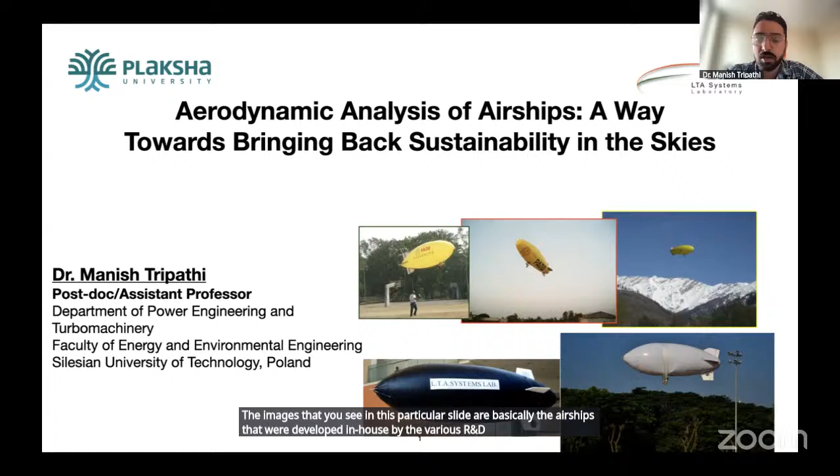So, the particular lab that we represent, the LTA Systems Lab, has been engaged in research and development of lighter than air systems for more than 2 decades. In fact, we are the pioneering lab that works in this field in the whole of Asia. The images that you see in this slide are the airships that were developed in house by the various R&D teams of this lab. So we have been privileged to pioneer this technology on a national level in India.

So, considering the fact that these systems are very low speed in nature, people don't realize how a low speed nature can be a very complex problem to solve. Lighter than air systems, we generally say, are a complex flow carrier. That is why aerodynamic analysis related to these applications is paramount, and hence the particular talk that you are a part of. This is an outline of my presentation today.

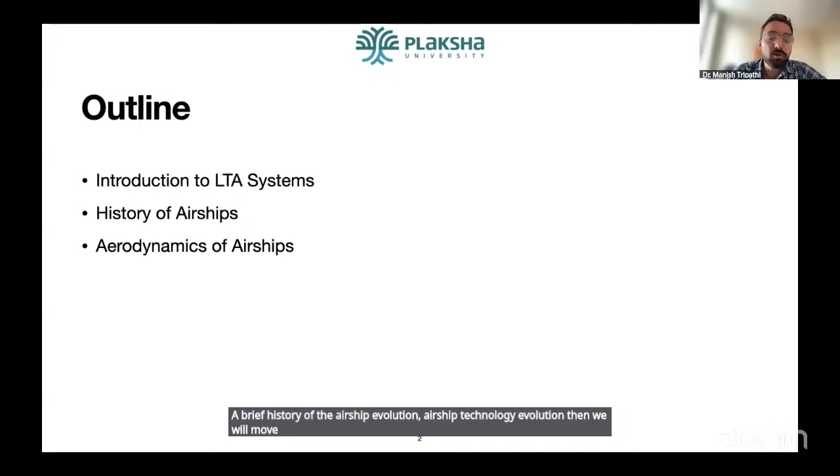Since this is the first lecture of the series of guest lectures, I will be briefly giving an introduction on LTA systems and a brief history of airship technology evolution. Then we will move on to the main topic of today's talk, the aerodynamics of airships: the different methods to understand the overall aerodynamics of airships, and the most appropriate method used recently, CFD analysis, which I will cover in a later section. After that, I will cover certain CFD investigations that we at IIT Bombay carried out previously to understand the aerodynamics of airships, and then finally the concluding remarks.

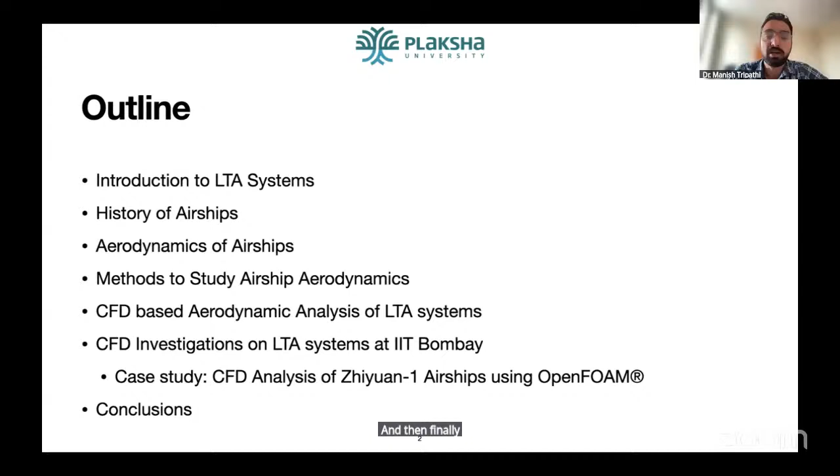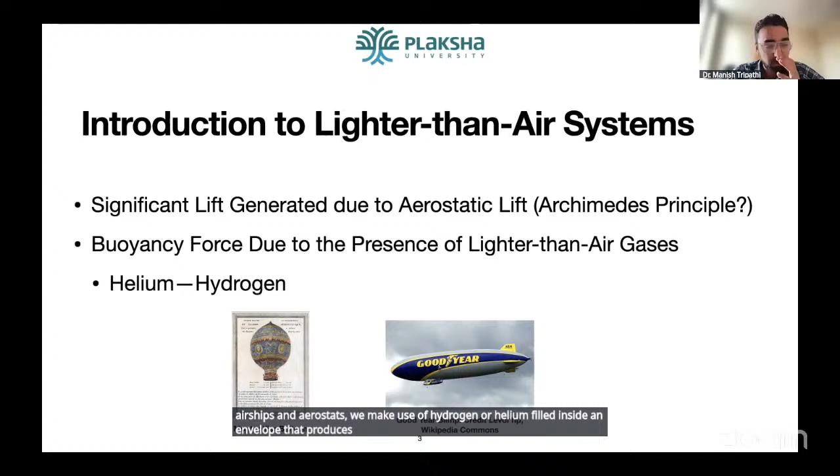So, because this is part of the LTA systems course that has already been started by Professor Pant at Plaksha University, I don't need to get much into detail introducing them. These are systems that generate the overall lift by means of aerostatic lift, governed by the famous Archimedes principle. The Archimedes principle states that whenever a low density body is suspended in a higher density fluid, an upward force is generated on it, called the buoyancy force. In lighter than air systems like airships and aerostats, we use hydrogen or helium filled inside an envelope that produces the required density difference, and hence the buoyancy force.

This is a brief comparison of lighter than air systems versus heavier than air systems. I'm pretty sure Professor Pant has already covered most of it. However, for our current lecture, the most notable point is that lighter than air systems are reliant on aerostatic lift and a subtle amount of dynamic lift, whereas heavier than air systems do not generate any aerostatic lift. They are solely dependent on the lift generated by the propulsion systems fixed on them.

Because of this, lighter than air systems are more fuel efficient. They make use of fewer operating mechanisms. However, because of their blunt geometry, they are very slow and highly susceptible to weather conditions. So the most notable point is that they are highly fuel efficient. That is the crux of why these systems are coming back, despite heavier than air systems being faster and more robust with respect to weather.

So there are three types of LTA systems. One is the aerostat. These are static in nature. They are unpowered. They include only stabilizing surfaces to provide stability to the device.

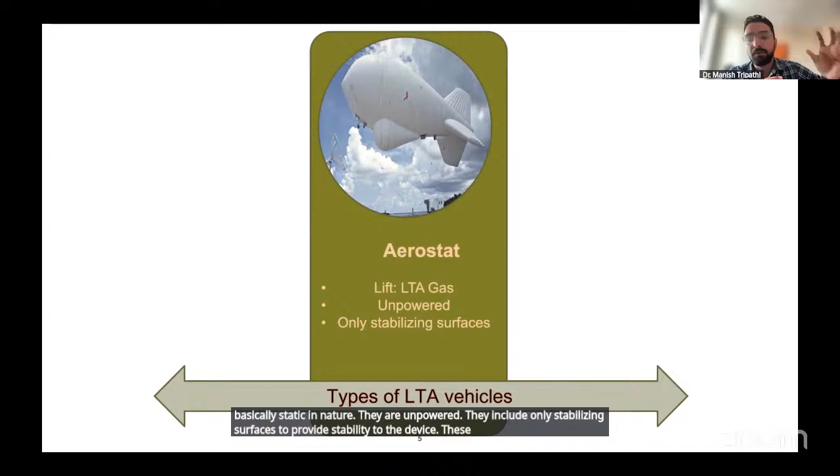These are basically static at a particular altitude and a particular position to carry out a particular application. The second and the most notable form of LTA system is called the airship. These are maneuverable. Basically, they are fitted with certain propellers and thrusters to carry out the maneuvers from one place to another, and hence they are provided directional control.

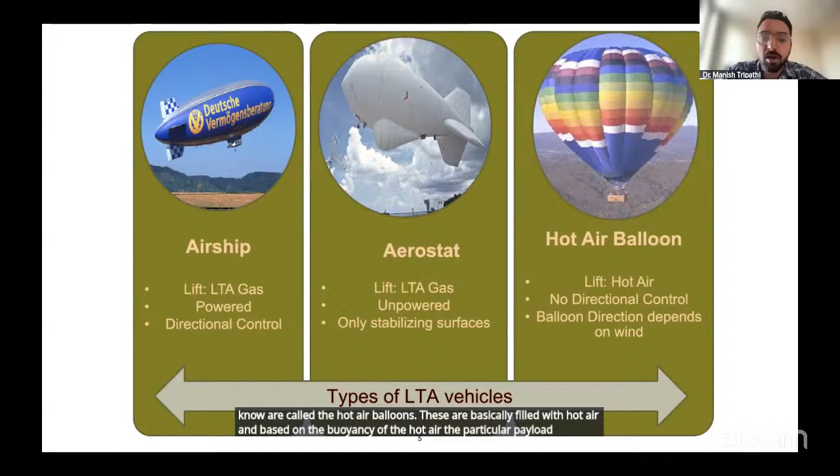The third, and most of the students might know, are called the hot air balloons. These are basically filled with hot air, and based on the buoyancy of the hot air, the particular payload is lifted up to a particular altitude. In the present talk, we'll be mainly focusing on the airships. So before going on to the more intrinsic details, we should firstly cover the fundamentals. So what are the principles?

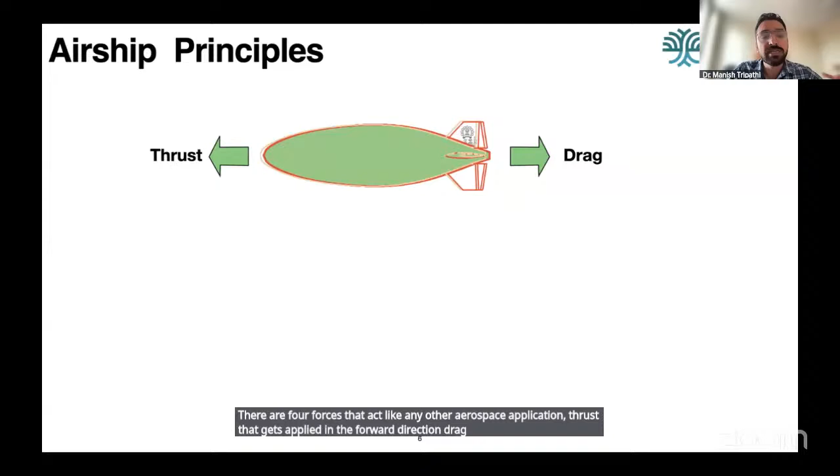Whenever an airship is operated, there are four forces that act like any other aerospace application. Thrust that gets applied in the forward direction, drag, which is opposing this forward motion in the opposite direction of the motion, weight because of the mass of the body, and the lift that is generated because of the overall aerodynamic and aerostatic lift. So the most amount of lift related to airships is generated because of the Archimedes principle,

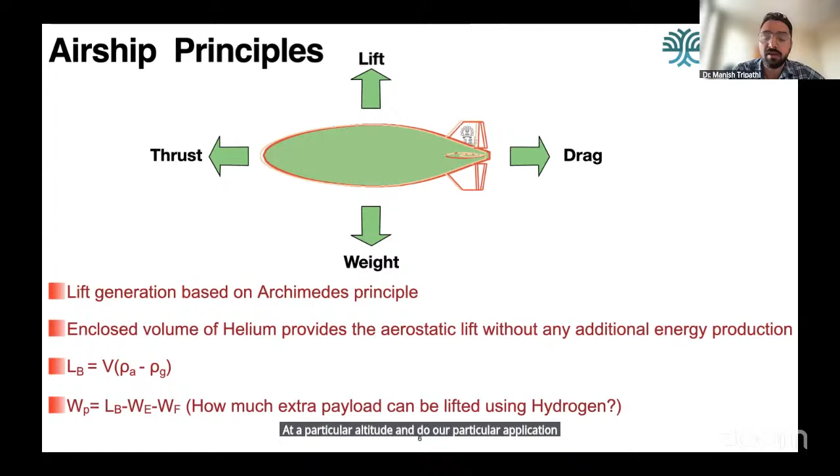and as I mentioned to you, this is based on the difference between the outside air and the gas that is engulfing the envelope. So based on this difference, we generate the required amount of lift, and we can take a particular application on board at a particular altitude and do our particular application. That might be any scientific observation or a leisure flight or anything.

So these are the two components: the gondola that houses the payload specific to that airship application. That can be any sensor, a telemetry sensor, or any particular sensor. In the case of a cargo transport, that could be a housing for the basic payload. Then the second important aerodynamic surface is the control surfaces. These provide the required stability as well as controllability to the airship to maneuver it from one place to the other place.

The third and the most important part of airships from an aerodynamic standpoint is the envelope, because the envelope is the most contributing component related to different aerodynamic aspects of airships. So based on the overall structure, there are different types of airships. First is called the rigid airship. So the way these are categorized is that the outer shape that you see, which particular component maintains that shape, determines the overall airship type.

So in the rigid airship type, the shape that you see outside is basically maintained by the rigid body. This rigid body is embedded with a number of gas bags, which have the lighter than air gas. Based on this lighter than air gas, the overall buoyancy force is generated. Second type is called the non-rigid ships. These are also called the pressure ships or the dirigibles.

So in these particular types, the shape is maintained by the envelope itself, and the payload that you see in the downward direction is suspended via curtain to the envelope. The third and the most notable ones, which are being used very profusely these days, are called the semi-rigid. Basically, here the shape is maintained by the envelope, but there are certain reinforcements that are installed, through which we are able to install other supplementary controls like the propulsion systems or the payload and the control surfaces.

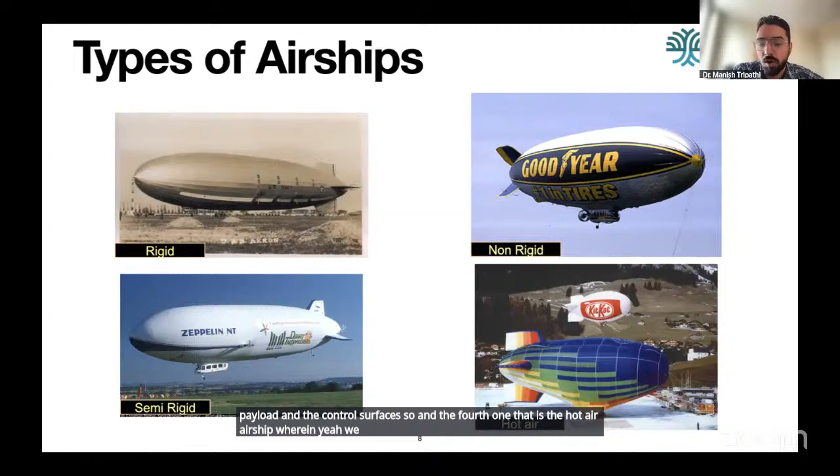And the fourth one is the hot air airship, wherein we make use of the hot air to create the required buoyancy and hence take it to the particular destination. The fifth and the most progressive type of airship is called the hybrid airships, wherein rather than making use of only the aerostatic lift, we may also make use of the dynamic or the aerodynamic lift to generate the lift. Because of the combination of these two lifts, we are able to generate a lot of lift, and we can carry a lot of payload without causing a lot of fuel consumption.

So then based on these, let's have a look at the historical. So as a researcher, I always suggest to all the students that whenever you want to actually draw interest towards a particular topic, you should have a lot of focus on the history. Perhaps this is why I was so much interested in the airships. So from my understanding, the airship evolution can be divided into these five parts.

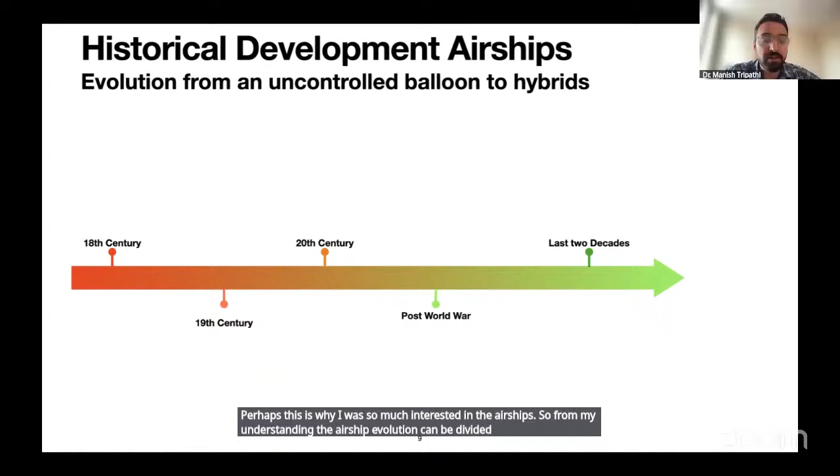In fact, airships can be very easily touted as the technology of the first. Most of the aeronautical technological development that we see would not have happened if there were no airships developed. So in the 18th century, the Montgolfier brothers, as many of you might know, developed their first hot air balloon, and this was the first flight wherein a man was able to ascend to a particular altitude.

Then in the 19th century, you see this Santos Dumont airship. He developed a series of airships. Most notably, you can see that the design of the airship has now come from a spherical design to a more streamlined design. So airships can be touted as a way of how aerodynamics also evolved in the aerospace industry.

So then in the 20th century, considering how these could be operated with very little fuel consumption and could operate in a very stable fashion, these were used comprehensively by the Germans during the World War I era. Through airships we were able to obtain the first transoceanic flight from Germany to USA. Considering these advantages, these were comprehensively used in World War I by the German military.

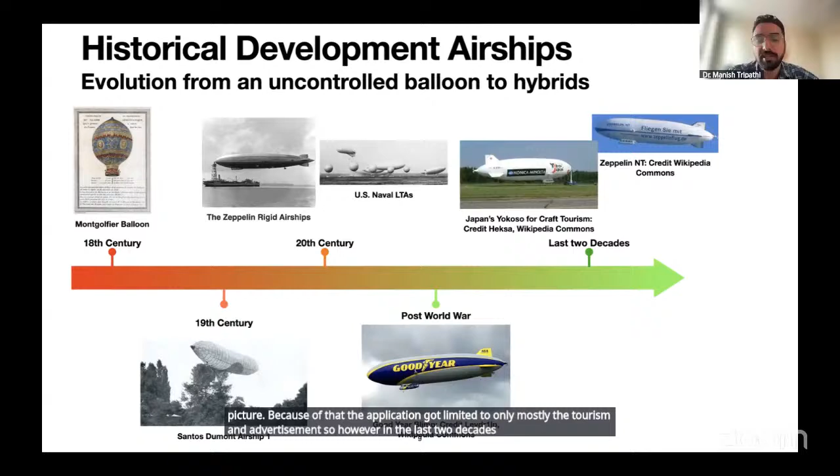However, in the last 2 decades, considering the increased cost price, considering the development in material and safety technologies, many companies are now coming on board, and many countries are also trying to come into this particular field, and now these are being touted to be used not only for advertisement or tourism, but are also being explored for cargo as well as space exploration missions. So a word on here, airships cannot be taken without.

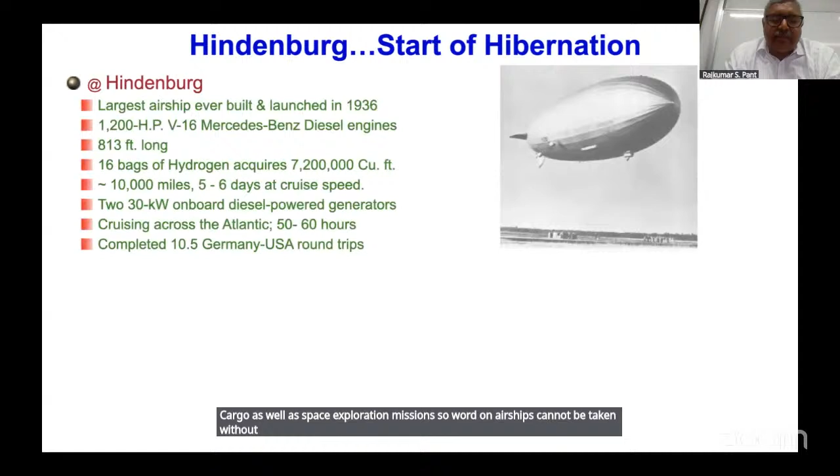Manish, sorry, may I interrupt? Maybe you skip Hindenburg. They have done a detailed assignment on that. Okay. Just go ahead. Yeah. Come to aerodynamics.

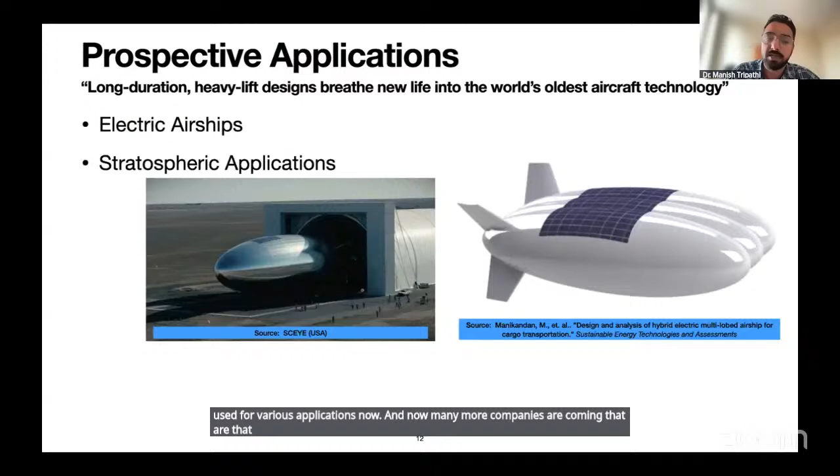Yeah, so these are certain applications. Because of their stability and their long endurance, these are being used for various applications now. And many more companies are coming that will be using them as electric airships, stratospheric airships, cargo transportation, and luxury flights. Moreover, space applications are also being explored through the usage of airships. The USPs of airships are that they can be operated from open fields. They have a large cabin space, low noise, low environment pollution, and many other benefits.

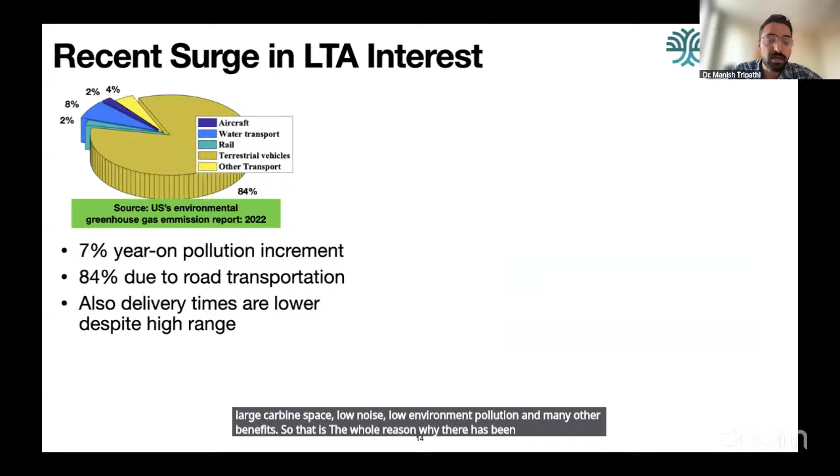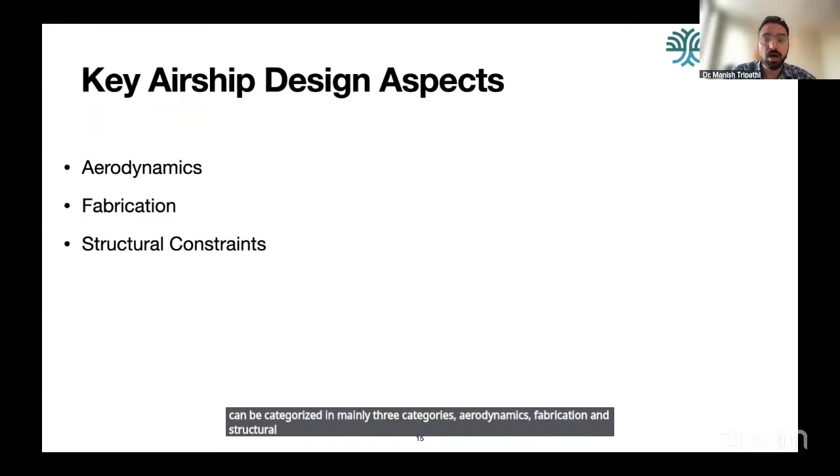So that is the whole reason why there has been a recent surge in their application. In fact, these fall in the optimum position from a transportation point, wherein they provide you a faster speed as well as lower fuel economy. That is why there is a lot of surge in the overall LTA research avenue. Because of this, a lot of R&D is being carried out. This R&D can be categorized in mainly three categories: aerodynamics, fabrication, and structural constraints. In our talk, we will be focusing mainly on the aerodynamics.

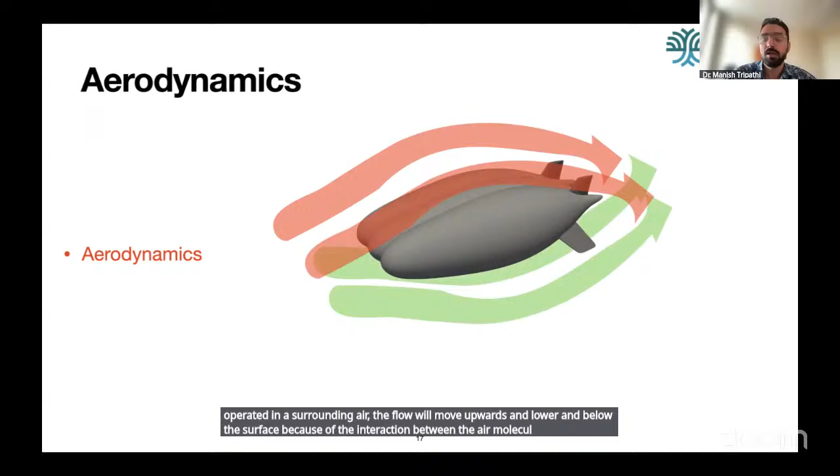So what is aerodynamics? Basically whenever the airship is operated in the surrounding air, the flow will move above and below the surface. Because of the interaction between the air molecules and the solid body, there will be interactions. So aerodynamics is basically the study of the properties of moving air and the interaction between the air and the solid bodies moving through it.

Based on this understanding, we calculate the different flow variables, that is the pressure and velocity, through which we can understand the different performance metrics related to airships and the overall performance of airships. So this is what aerodynamic study is. Because we are considering airships which operate mostly in low subsonic applications, the most important parameters that an aerodynamic analysis entertains are the velocity and pressure distribution. So keep this in mind. I will be asking a question regarding this in a particular slide.

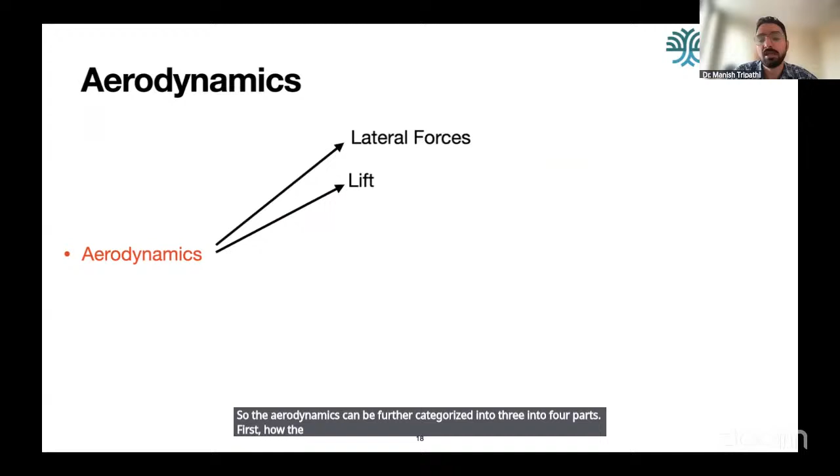So the aerodynamics can be further categorized into four parts. First, how the lift is generated, what are the lateral forces, what are the drag penalties, and what are the pitch and yaw moments. Let's understand these different components separately. So whenever an airship gets exposed to external flow, these aerodynamic forces are generated.

These are categorized as lateral forces. So these lateral forces come into picture because of the presence of side wind conditions. The pitch and yaw moments come because there is always a tendency of the airship or any aerospace application to rotate about a particular axis, and this is where the pitch and yaw moment understanding comes into the picture.

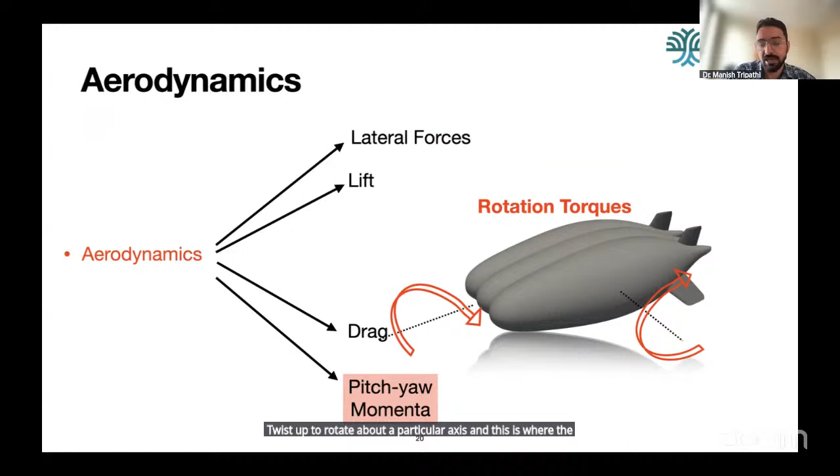The lift is one of the most important aerodynamic parameters related to airships, because in the modern airship designs, these are not only limited to aerodynamic and buoyant lift, but also to vector thrust lift. So this is also one more. So the overall lift that is generated by the airship through these components will ultimately determine what is the payload carrying capacity of your airship.

So this lift will ultimately determine how much payload you can carry. This will be a sum of buoyancy as well as aerodynamic lift. So as you go on increasing the envelope, your lift also increases. But on the contrary, the drag penalty also increases.

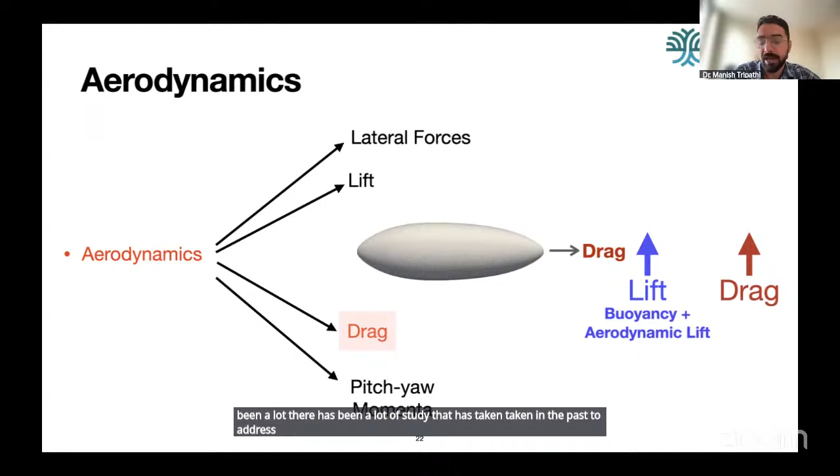Now, what is drag? Drag is basically opposing the motion of these airships, and hence will determine the overall performance of airships, overall efficiency of your airships. And hence there has been a lot of study that was undertaken in the past to address this shortcoming, and how to mitigate this problem. So let's understand this drag.

In the case of airships, this drag is basically composed of two components. First component is the viscosity induced skin friction drag. The second is related to adverse pressure gradient and induced drag. The drag that is associated with these is mostly because of the presence of the airship hull. So let's understand these drag components first. The first component that I mentioned to you was the viscous drag.

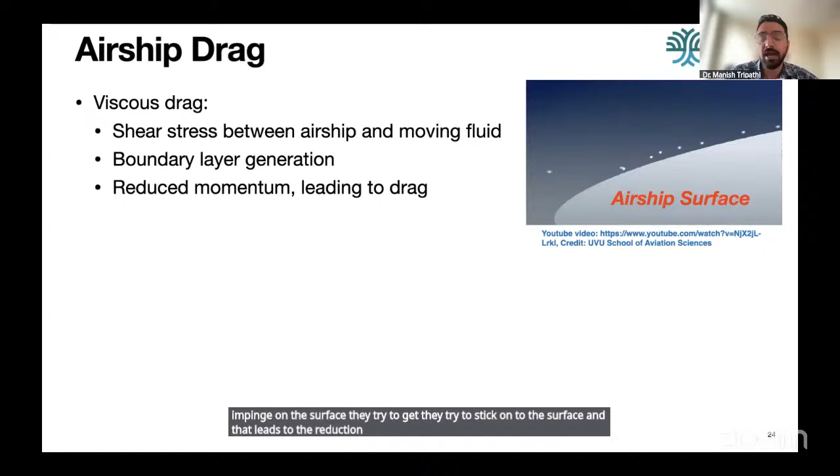So now what happens whenever an aerospace application is subjected to free stream flow, these particles that impinge on the surface try to stick onto the surface, and that leads to the reduction of momentum, and hence there is an inherent resistance to the airship that is provided by the flow. This is called the viscous drag component.

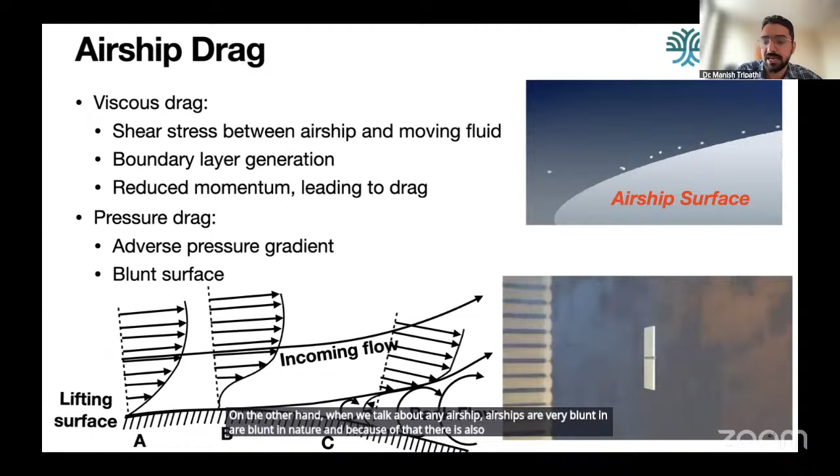On the other hand, airships are very blunt in nature, and because of that there is also a pressure drag. Let's understand this. So whenever a blunt surface is subjected to an incoming flow, because of the bluntness, there is a pressure differential between the front and the rear end. Because of this, a suction region that you see in this figure is generated behind the airship. This is responsible for a lot of eddies, and hence the pressure drag.

However, if we streamline the flow, there is an additional disadvantage that the wetted area increases and hence the viscous drag increases. So whenever we are trying to optimize our geometry based on these two components, we have to strike a balance between how much viscous drag we can cater to and how much pressure drag we can reduce. So there is an optimization that is involved in mitigating this.

The third component: because these airships are three-dimensional in their geometry, there is an inherent three-dimensionality related to the flow. Because of this particular flow characteristic, there is a lot of induced drag that is generated. I will not be covering much of this because of brevity constraints.

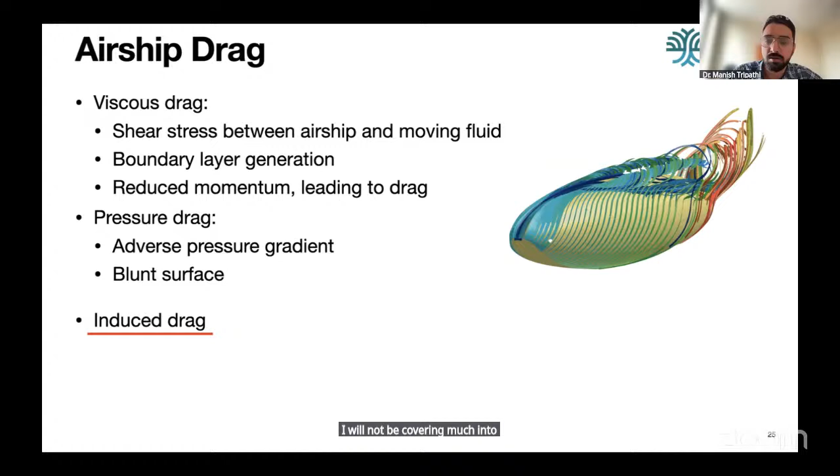Then the fourth is called the interference drag. So at the junction between the airship and the fin body, there is flow interference between the two boundary layers. This leads to the generation of interference effects or the interference drag penalty.

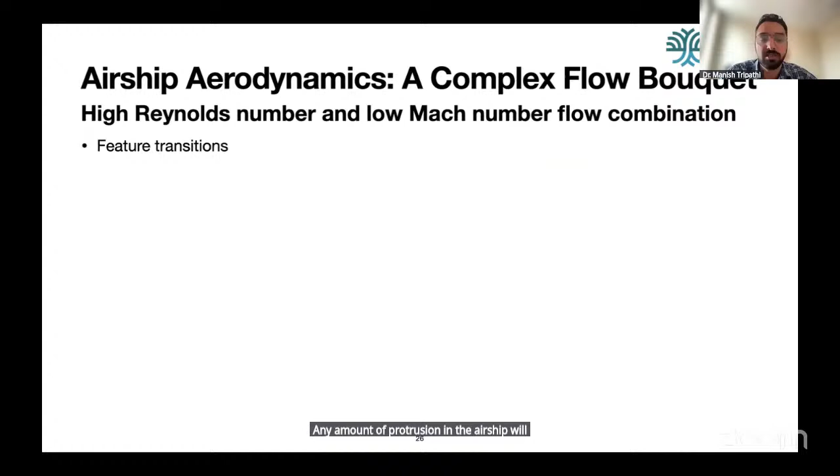So let's address certain complexities now. We went through the basics and now understand that because of the high Reynolds number and low Mach number condition, there are a lot of flow complexities involved in airship aerodynamics. First, feature transitions. Because your flow is very low Mach number, any amount of protrusion in the airship will lead to a lot of transition, and that leads to flow complexity.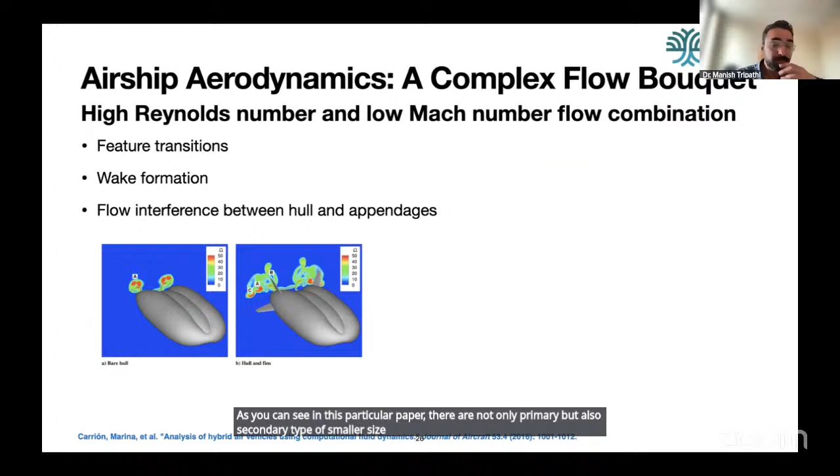The second is because of the overall blunt geometry, there is a wake formation at the stern portion. This leads to the generation of a lot of non-linearities in the flow, and hence the flow becomes complex. Additionally, because of the low subsonic and the high Reynolds number characteristic, there is a lot of interference between the hull and the fin surfaces. As you can see in this particular paper, there are not only primary but also secondary vortices of smaller size generated from the airships that lead to flow complexities.

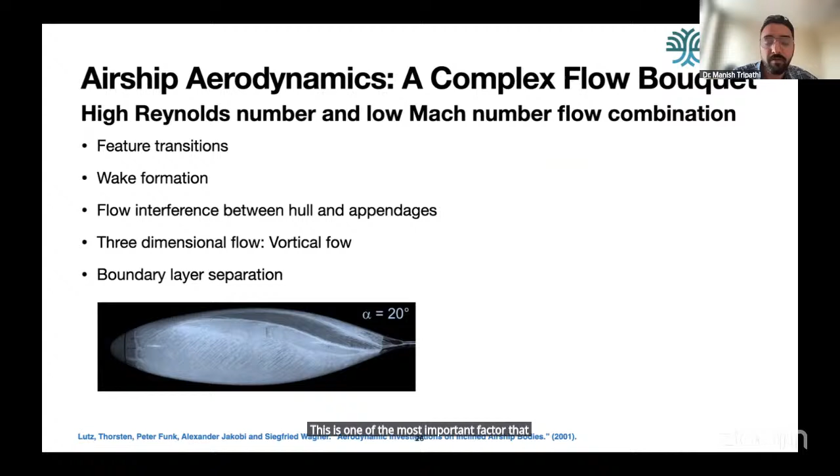Now, as I already mentioned, the flow is three-dimensional in nature, and that leads to the generation of vortical flow. Airships are also amenable to a lot of boundary layer separation because of the adverse pressure gradient that I just mentioned to you. In fact, this is one of the most important factors that needs to be understood while carrying out aerodynamic analysis of airships from scratch. Then because of the high Reynolds number, there is a tendency of the flow to transition from laminar to turbulent flow, and hence this leads to generation of a lot of eddies and vortices

that lead to further flow complexities. Now, unlike normal conventional wings that generate lift, airships generate lift in a more non-linear fashion, and hence proper care has to be taken throughout the angle of attack operations to understand the overall aerodynamic performance.

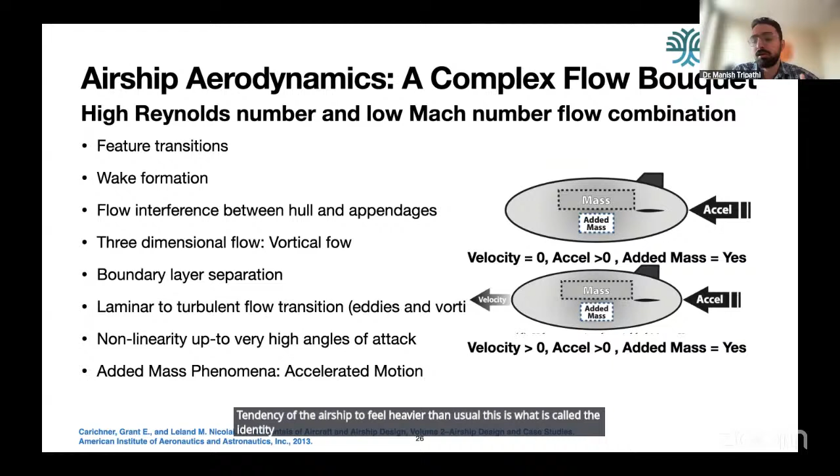This is the most recent form of airship complexity that has been investigated: added mass phenomena. Because of the big size of the airship, these are linked with a lot of added mass phenomena. This is similar to what your car would feel when it is trying to start. Whenever an airship tries to accelerate, there is a tendency of the airship to feel heavier than usual. This is what is called the added mass phenomena. A lot of study is being done to understand this particular phenomena. So we can very clearly see that airships are a body of complex flow phenomena, and a lot of study is taking place to understand the aerodynamics.

So why, you might say, do we need to do the aerodynamics? We have the designing tools, we have the optimization tools. Why do we need to understand the aerodynamics? This can be understood from two or three examples that I mention here. This is one particular study that was carried out in 1960. They carried out an experimental study on a particular airship embodiment, and based on this analysis, they were able to understand that if they incorporate a propeller at the stern portion, they will be able to reduce the drag by more than 40%.

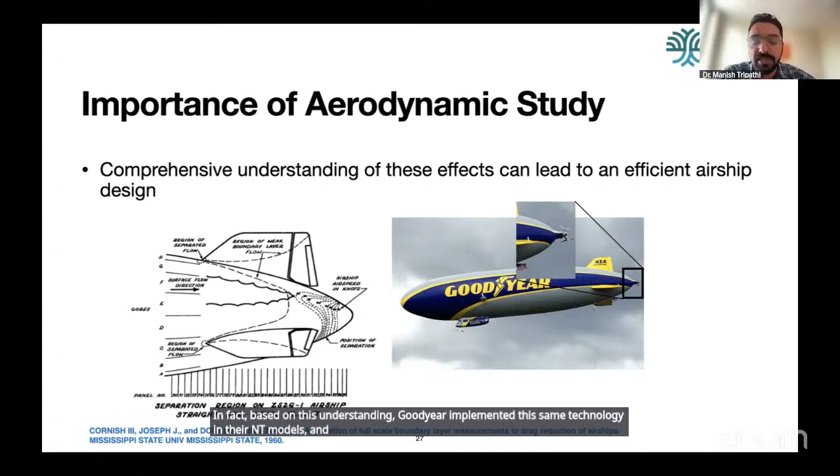In fact, based on this understanding, Goodyear implemented this same technology in their NT models, and they are being comprehensively used in their recent airship bodies. Based on this understanding, we can also understand how the fins and appendages could be placed on the aerodynamic body to improve the overall aerodynamic performance. We can understand how to design these additional lifting surfaces to improve the aerodynamic performance, based on the aerodynamic requirements that we have.

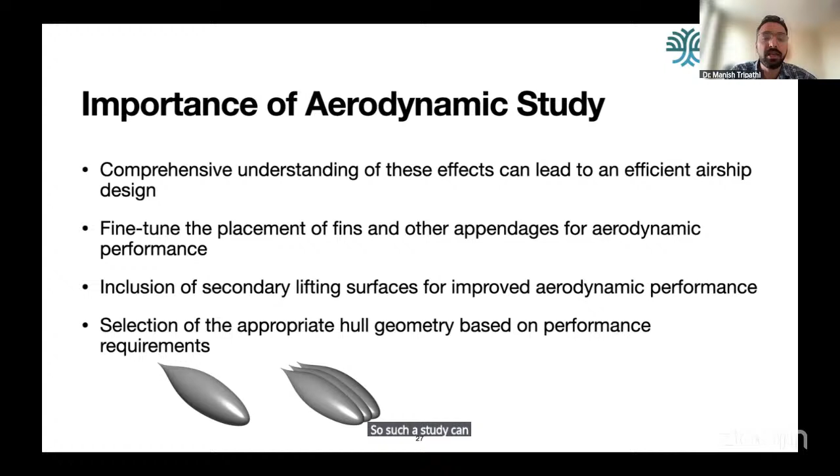For example, the study that you see was carried out by our lab, wherein we tried to understand whether a single lobe or a tri-lobe is better for our application. Such a study is possible only if you start by carrying out aerodynamic analysis of the overall geometries. So there are three methods to understand the aerodynamics.

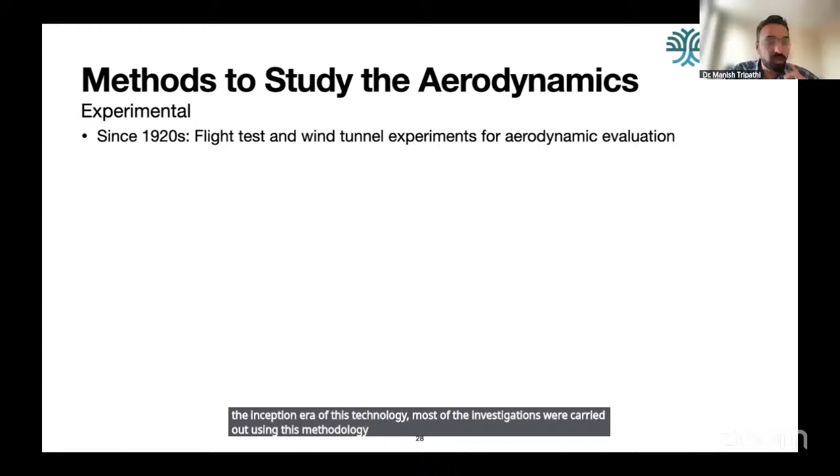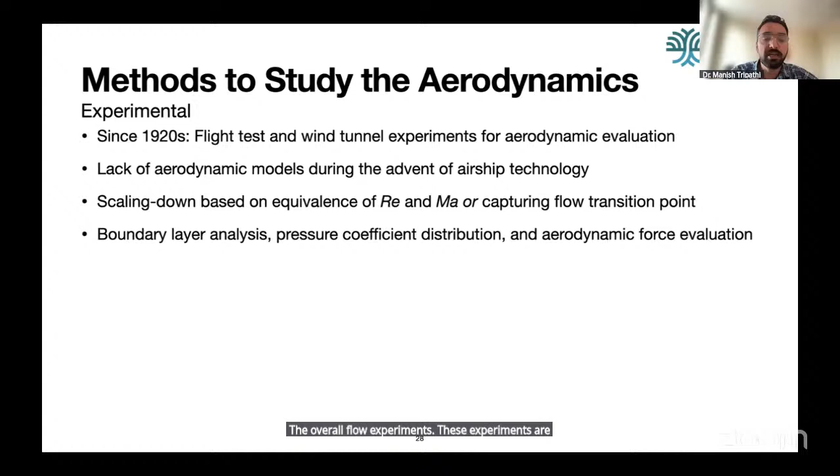Firstly, and the most notable one, which most of you might already know, the experimental techniques. During the inception era of this technology, most of the investigations were carried out using this methodology only, making use of flight tests and experimental techniques. Basically this method involves scaling down the particular model and carrying out the overall flow experiments. These experiments are further associated with boundary layer analysis, pressure coefficient distribution, and aerodynamic force evaluation.

And based on this understanding, a lot of studies and analyses were done. A lot of papers had already been published in the era of the 1920s to 1960s. However, it has only been in the recent 10 to 20 years that more papers are coming out because of the popularity airships are getting owing to their reduced fuel consumption advantages.

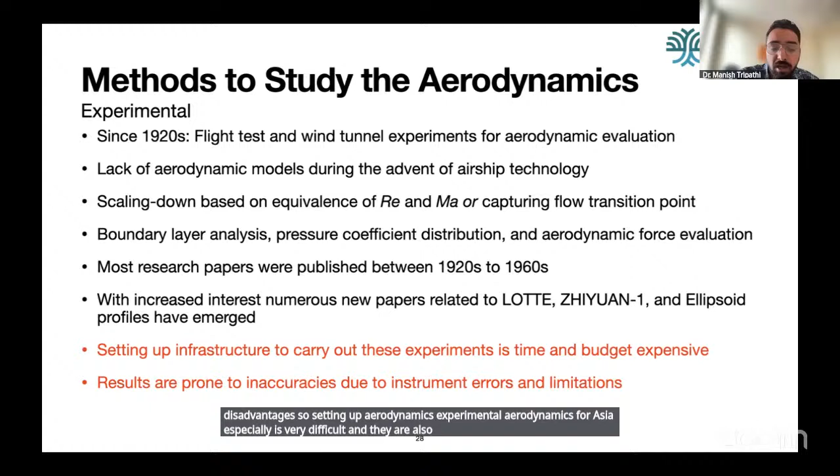So, though we are able to get sufficient understanding related to the aerodynamics of airships through this analysis, it comes with a lot of disadvantages. Setting up experimental aerodynamics for airships especially is very difficult, and it is also prone to a lot of inaccuracies due to the limitations of the instruments.

So the second method that we can make use of is the analytical methods. So what are analytical methods? These are basically semi-empirical relations that link the flow conditions with the output CL and CD data, that is the force data, based on the experimental data that we have already obtained. So this is a function of the wind tunnel data that we already have. Based on this, we derive relations and form certain semi-empirical relations to understand the aerodynamics.

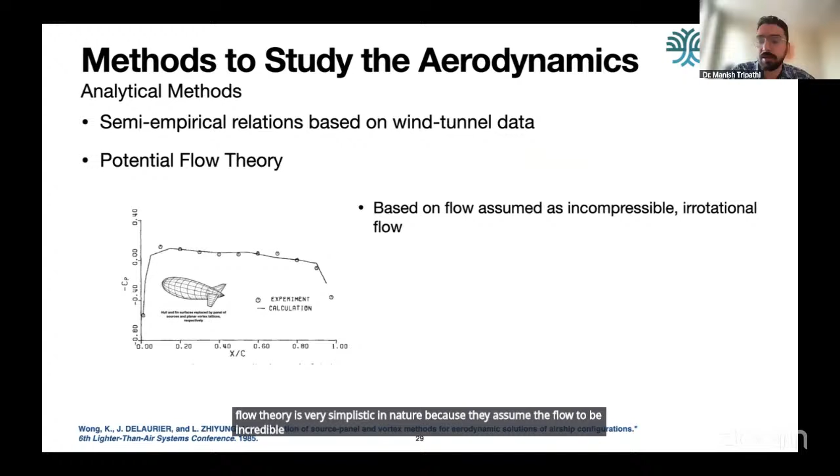There are many very basic types of methods that were used erstwhile. The potential flow theory, wherein we divide the whole body into a number of panels, and on these specific panels we solve a number of semi-empirical relations to understand the aerodynamic forces acting on the airships. Potential flow theory is very simplistic in nature because it assumes the flow to be incompressible and irrotational. It is applicable only for small angles of attack. It neglects viscosity, and it also lacks a universal model.

So a particular panel method that you devise will be only applicable for that particular airship body or application that you are analyzing. So there is a complete lack of universal acceptance. There is an advanced version of this model wherein we integrate boundary layer equations with the panel method to account for viscosity as well, but these are also very simplistic in nature. Then there are certain analytical methods for added mass estimation. This is a more advanced topic, which is not very appropriate for this particular forum right now.

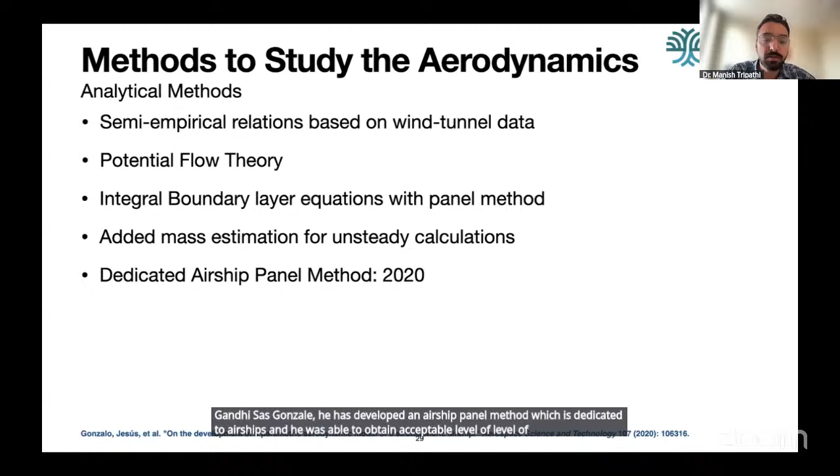Very recently, one of the speakers that we were able to interact with during one of our conferences at IIT Bombay, Jesus Gonzalo, has developed a panel method dedicated to airships, and he was able to obtain an acceptable level of accuracy, through which he was able to understand the aerodynamics related to airships. These results are simpler to obtain, but they entail a number of assumptions.

So experimental results are good, but they are expensive to obtain. Analytical methods are easier, but they are not very realistic from an application standpoint. So now where should we go? That is why most of the studies that you see these days in most aerospace applications, including LTA systems, are making use of the third method, that is the CFD based aerodynamic analysis of LTA systems.

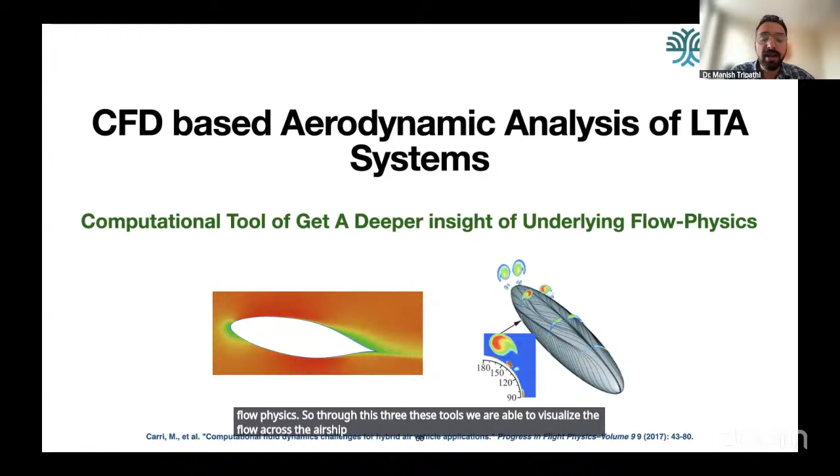So what are CFD methods? CFD methods basically make use of computational fluid dynamics, or in a nutshell, computational tools to get deeper insights into the underlying flow physics. Through these tools, we are able to visualize the flow across the airship body, and by analyzing these flow parameters, we are able to understand the overall aerodynamics of LTA systems.

So let's understand the CFD process in a more detailed manner. How a CFD process works is that it makes use of a suite of software to design, to analyze, and to process your results to understand the overall aerodynamics. In the first stage, we make use of a model generation software. This could be any software like CATIA, SolidWorks, or any other designing software.

This model is further fed into a different modeling software, wherein we design the flow setup. Flow setup is analogous to setting the stage for a particular stage performance. Just like in a stage performance, you have to say where a particular performer will sit and what props will be used. Analogous to that, in any CFD method, you have to tell the solver what parameters are initially available to carry out the simulation. This is how the flow setup and boundary condition selection happens.

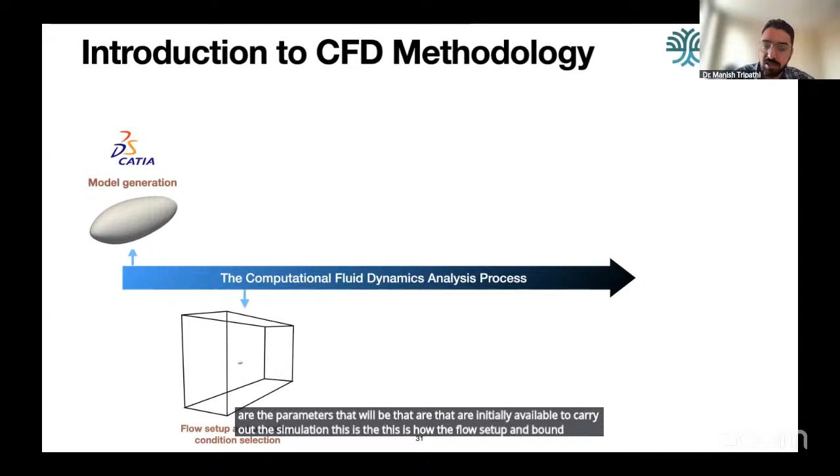In the third phase, the meshing process is initiated, wherein the domain that you see there is divided into a number of cells, and it is on these cells that the solver does some calculation and gives you the particular flow parameter values. After all these things are done, after the meshing is done, these boundary conditions and the mesh are fed to the solver.

This solver could be anything like OpenFOAM, ANSYS, or CFD++. There are a lot of internal settings that can be selected based on your problem. You can refer to any of the papers that we have published to get more details into that. However, in most of our cases, we made use of the RANS based methods to carry out our simulations. Then after setting up the solver, we carry out the simulations.

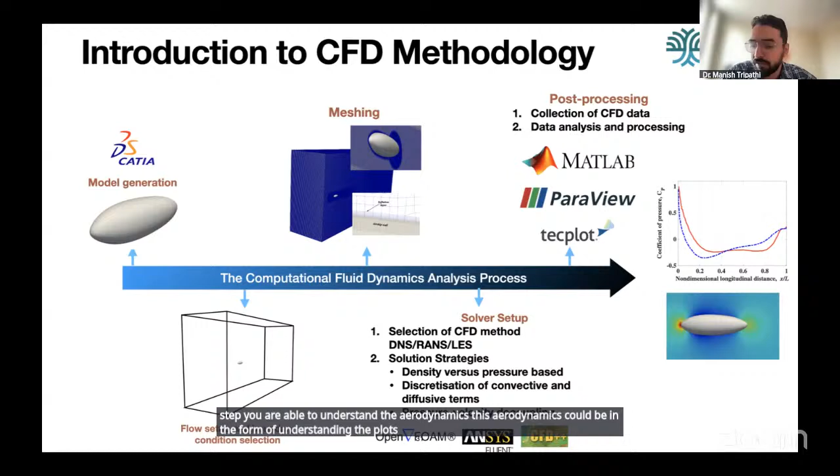These simulations are further fed onto a post-processing software. These software could be anything like ParaView, MATLAB, Tecplot. Through these softwares, you can carry out the post-processing or the data analysis of these results. And after analyzing these results through your post-processing step, you are able to understand the aerodynamics. This could be in the form of plots, the flow field visualization plots, or anything. So this is the overall picture of how a CFD process works.

Now let's understand the science. What happens actually behind the scenes? So what happens is that the air that is surrounding the airship that we are trying to simulate is divided into a finite number of cells. Now this step, as I already mentioned to you, is called the meshing step. I have elaborated this very clearly because from an airship CFD aerodynamic point of view, meshing is one of the most critical steps. If your mesh is not good, your results will never be accurate. So we replace the computational fluid domain with finite cells.

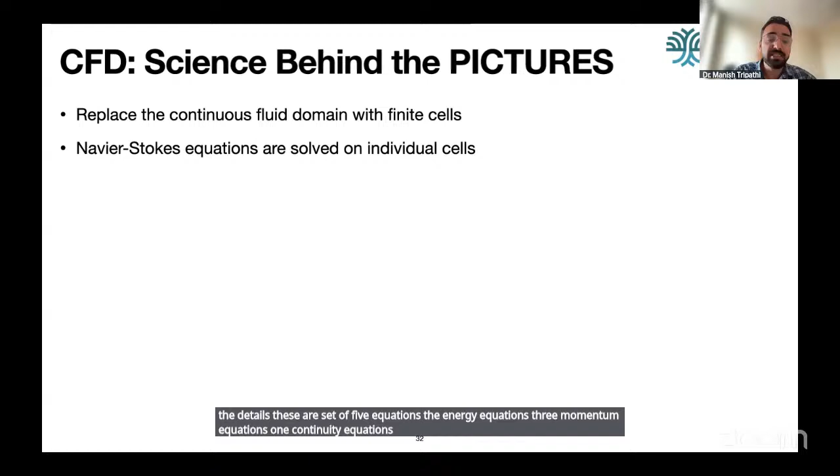Then after obtaining these cells, we need to solve a set of equations. Now these equations from a continuum point of view make use of something called the Navier-Stokes equations. You can go into the details. These are a set of 5 equations: the energy equation, 3 momentum equations, 1 continuity equation. These are very complex in nature. I will not delve into the overall numerical part of it, but you need to understand these are very complex in nature and are very difficult to solve.

So in most of the CFD softwares that you use, we do not make use of these equations, but we actually simplify them. The most notable simplified versions are called the Reynolds-averaged Navier-Stokes equations, or simply called the RANS equations. So what these do is, basically the Navier-Stokes equations are averaged in the time duration, and these averaged equations are further fed into the solver setup. Because of this averaging, there are some additional terms that are introduced in the equations. To solve those additional terms, we incorporate turbulence models.

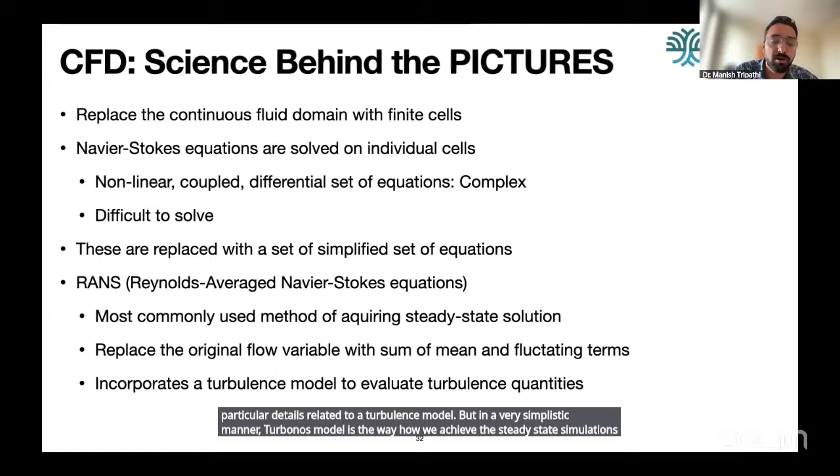So you can refer to any of our papers. I have very clearly elaborated on those particular details related to a turbulence model. But to understand in a very simplistic manner, the turbulence model is how we achieve steady state simulations in airship aerodynamic analysis. So after setting up all these conditions, we run the solver. Now the solver will solve these equations and get the results of the flow parameters at different points, and those are subsequently analyzed by your post-processing software.

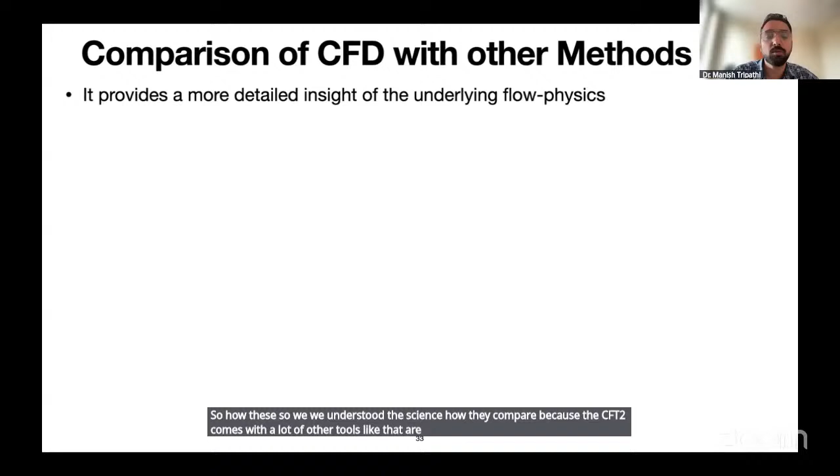So we understood the physics, the science. How do they compare? Because the CFD tool comes with a lot of other tools through which we are able to carry out post-processing, we are able to understand the flow physics in a more clear fashion. We can carry out this method across any flow condition that you actually want to operate on, whether it be low or high altitude application or stratospheric application, which is not possible in the case of experimental evaluations.

With a suitable model and setup, we can also include turbulent flow conditions, which are limited in experimental evaluations. One of the biggest advantages of the CFD methodology is that if we want to modify our current state of the art, we can modify it very easily through the computational tools. We can analyze it. We do not need to design the costly modified variant and do an experimental setup on the prototype, and hence this methodology is way cheaper from a time as well as budget constraint.

But the biggest disadvantage is that they require a lot of computational power and time. So unlike experimental evaluation, wherein you can obtain the results within a minute, computational CFD analysis will require some hours, in some cases some days also. So the complexity of obtaining the required solution also becomes more and more complex.

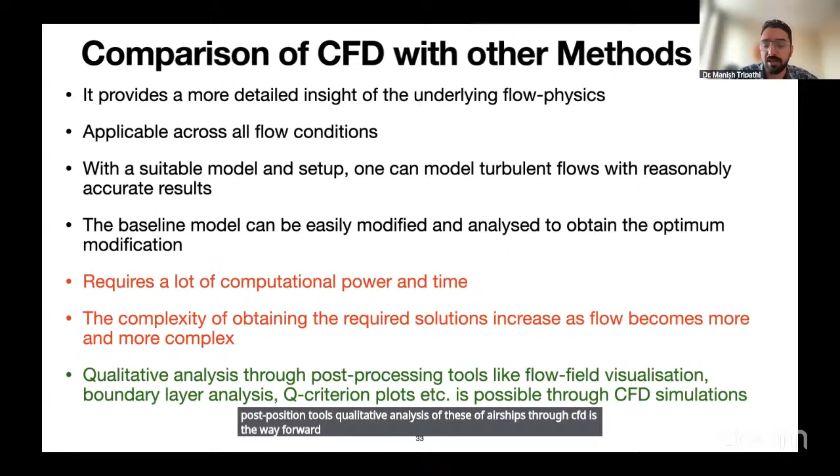So as you go on increasing the number of surfaces, the supplement surfaces on the body, the complexity becomes even more and more. But considering all these things, because these come with a lot of post-processing tools, we think qualitative analysis of airships through CFD is the way forward for aerodynamic analysis. So that's why most of the study that has been carried out in our lab has been focused on CFD analysis only.

There are certain challenges related to airships. These are very complex in nature, but the most notable points that you need to consider at this stage are that whenever we are trying to carry out CFD analysis, we have to be very sensitive to three different aspects. A, turbulence model: the CFD model is very sensitive to the turbulence model you select. B, the mesh that you select will be very crucial to carry out the aerodynamic analysis.

And C, your mesh, your solver setup will determine how well your solver will be able to capture the boundary layer variations, which is very important to understand the aerodynamics related to airships. So these are some of the critical points that you need to understand before carrying out CFD analysis.

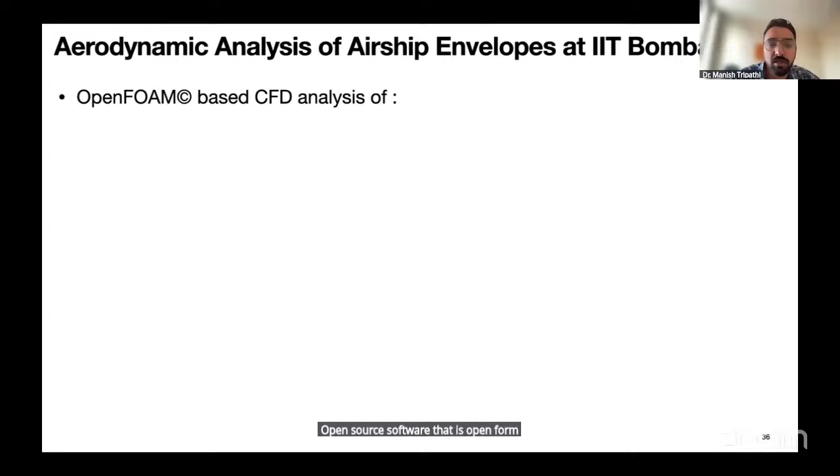So based on this, I'll just mention some analysis that we have already carried out at IIT Bombay. We have made use of open source software, that is OpenFOAM, to carry out the CFD analysis. This was carried out for single-lobe airships at different angles of attack. We carried out the same analysis for airships with fin configurations also, and also for different airship embodiments. We also carried out analysis for multi-lobe airships, and we also carried out an optimization study of tri-lobe airship envelopes.

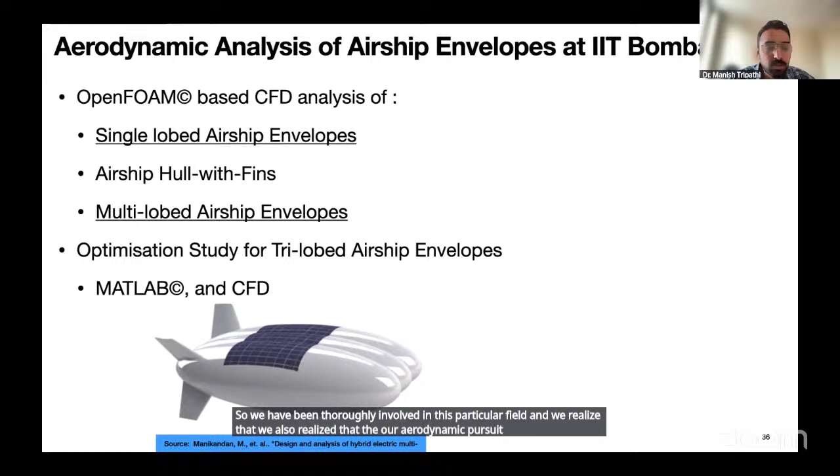So we have been thoroughly involved in this particular field, and we also realized that our aerodynamic pursuit cannot progress without including the most recent advancement in technology, that is integration of active learning with the CFD methodology. So very recently we have worked on integration of CFD and active learning techniques for design optimization of airships, wherein we made use of OpenFOAM and Python coding to formulate our design optimization scheme through the active learning technique.

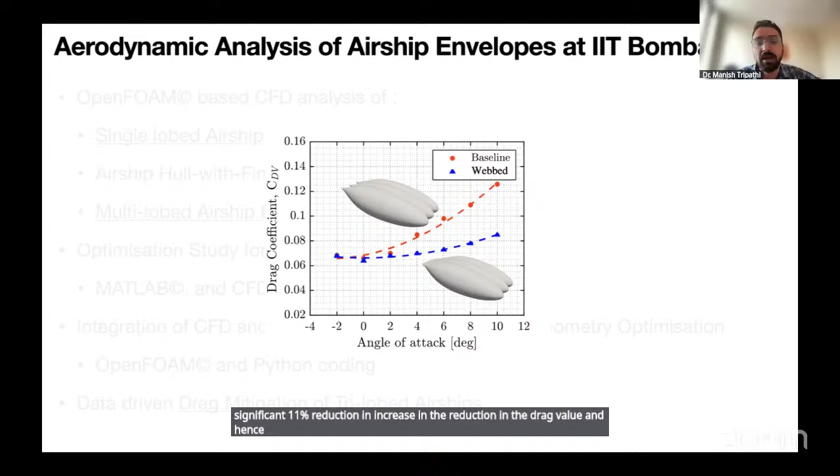Apart from this, we have also done data-driven drag mitigation of trilobe airships. So, for example, in this case, through our analysis, we designed a webbed airship design. Because of this design modification, we were able to achieve a significant 11% reduction in the drag value, and hence aerodynamic analysis was able to obtain productive results.

So we can say that yes, aerodynamic analysis will play a very critical role in the evolution of airship technology, and hence all the tools that I just mentioned to you, you need to study these tools elaborately. These will not only help you in airships, but in whatever aerospace application you want to analyze in the future.

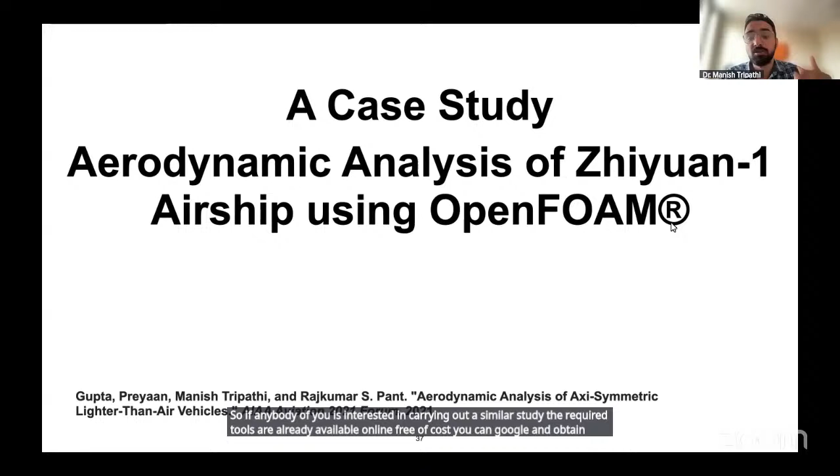So if any of you is interested in carrying out a similar study, the required tools are already available online free of cost. You can go to Google and obtain this software and also carry out the same study by yourself. So let's understand this study.

Before carrying out the study, a student should always understand the problem. To understand the problem, first they should understand what is the model that they are trying to simulate. So this is just a brief detail about this Zhiyuan airship. These were developed by Shanghai Jiao Tong University in 2009, and these were basically meant to operate remotely using fuel cells.

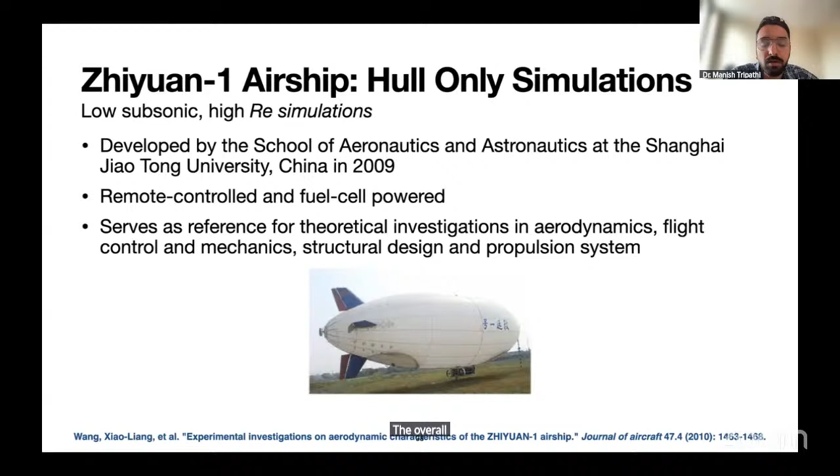The overall application of these airships was to carry out structural design and propulsion system of airships, and also to understand the overall aerodynamics of the airship and fin configuration. So this was the model that this particular study took care of. Whenever we do the literature survey, we will also get the details related to this model.

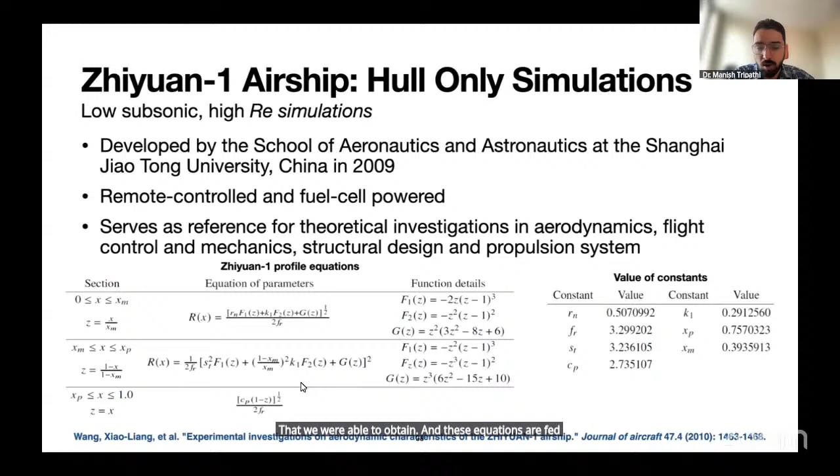So in this particular case, these are the set of equations that we were able to obtain, and these equations are fed onto your modeling software. After the modeling software is fed with this system, we are able to obtain the contour of the geometry, which can be further processed to obtain the three-dimensional model.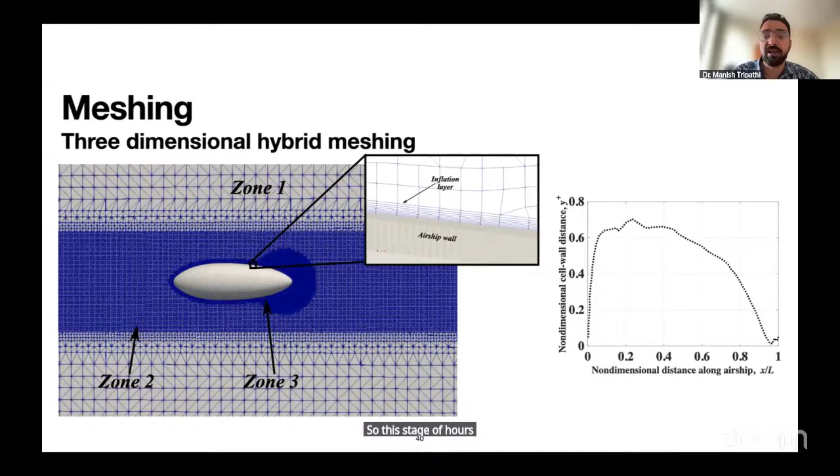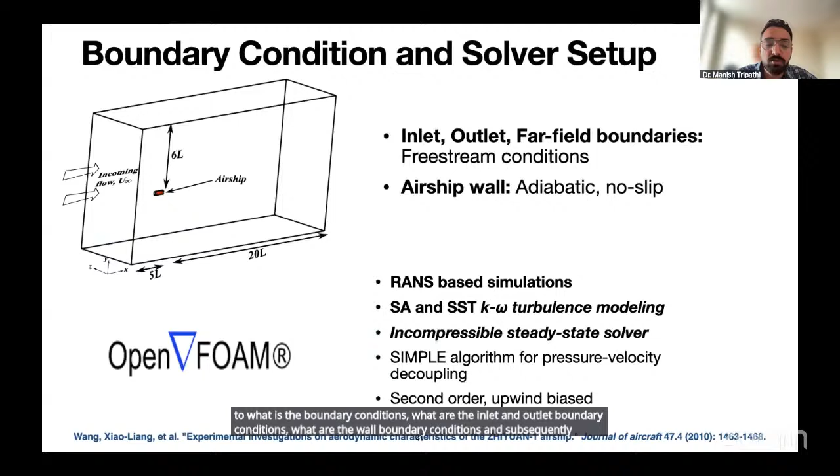So I highly recommend all the listeners, all the students, to understand this meshing process, especially for low speed applications like airships. Then after all these things are done, we give the information to the solver as to what the boundary conditions are, what the inlet and outlet boundary conditions are, what the wall boundary conditions are, and subsequently we feed these to the solver that we are using. In this particular case, we made use of the OpenFOAM solver.

As you see, in this method we made use of RANS based methods. The models that we used were SST K omega and SA. There are more than 5 or 6 types of turbulence models; out of the lot, we made use of these two. In order to understand how these models work, you can refer to our papers, where we have clearly mentioned it. However, we selected the SST K omega model because we were able to understand the boundary layer variations more efficiently. After all these things, we initiate the solver. It will carry out a sequence of simulations, and hence we obtain the results.

Now in any CFD method, obtaining a colorful plot is not the only prerogative. We also need to verify that the results that we get are accurate. To ascertain this accuracy, there are 2 stages to it: first, mesh independence, and second, solver validation. These 2 have to be carried out in any CFD analysis to ascertain the accuracy of your results.

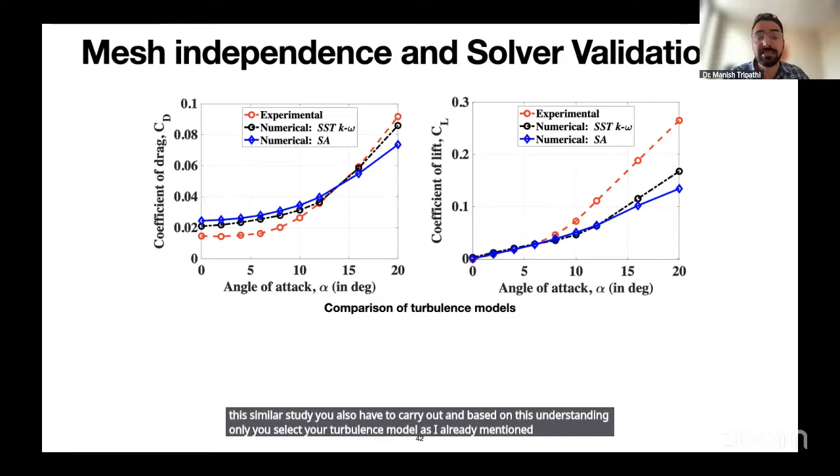So in this case, we firstly had to understand how the different models work, and as you can see in this particular plot, SST K omega was found to be better, and hence we selected that particular model. You also have to carry out a similar study, and based on this understanding only you select your turbulence model. As I already mentioned in one of the slides, turbulence model selection is very critical to your CFD analysis.

So the most important step after mesh independence is the solver validation. So in this case, what you do is you take a similar model that has already been experimentally evaluated, and in our solver we carry out CFD simulations for that particular model. We compare our results with the experimental results and see whether they match. If the two results match, then we can say that our solver is validated, and hence based on this understanding we can say up to an acceptable confidence that yes, the solver that we are using can be used for our CFD analysis overall.

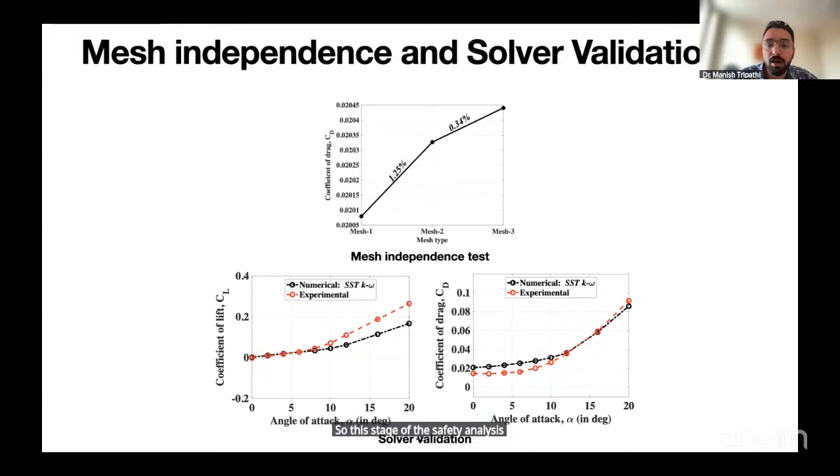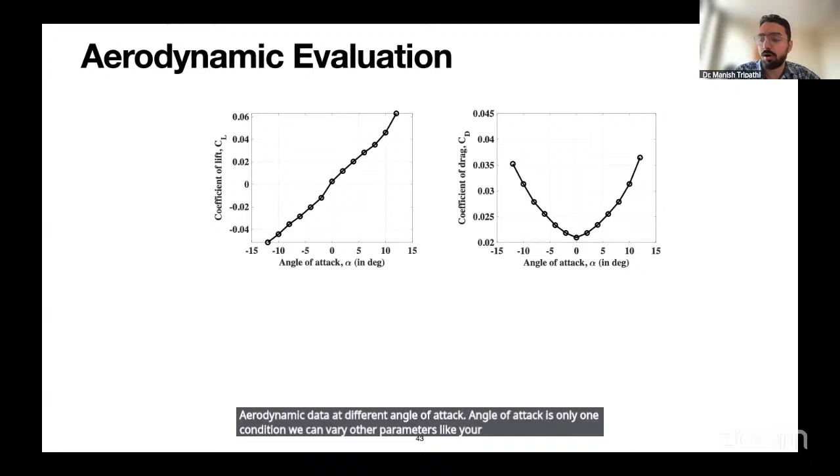So this stage of the CFD analysis is very important, and much focus has to be given to this particular stage. So after this is done, we carry out our normal aerodynamic evaluation. We get the different aerodynamic data at different angle of attack. Angle of attack is only one condition. We can vary other parameters like yaw condition or rolling condition, and based on that we can obtain the different aerodynamic results. And based on this we can understand how the overall aerodynamic application, like the airship in our case, is performing.

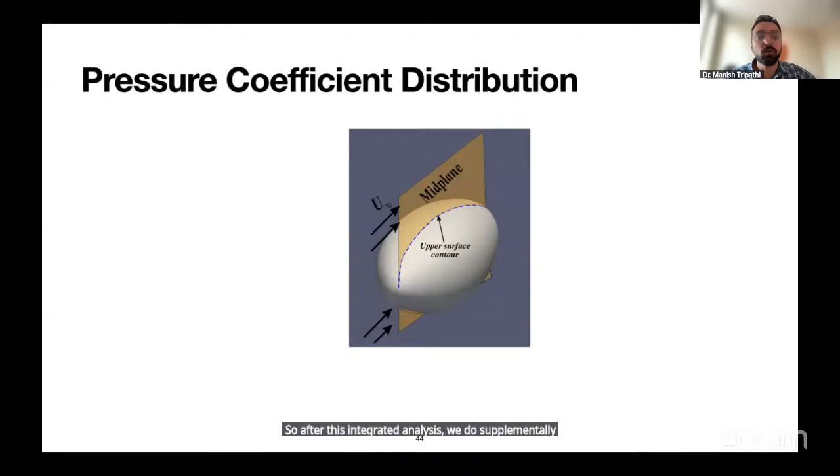So after this integrated analysis, we do supplementary analysis that could involve understanding the pressure coefficient distribution plots over the upper and lower surfaces at different angle of attack. And based on this analysis, we are able to understand in more detail the physics that is surrounding the aerodynamics of any airship application. After this, we can also make use of the colorful plots that you always see related to CFD analysis. So as you can see, we are always seeing these CFD color plots and all, but the overall science that goes behind is much more detailed.

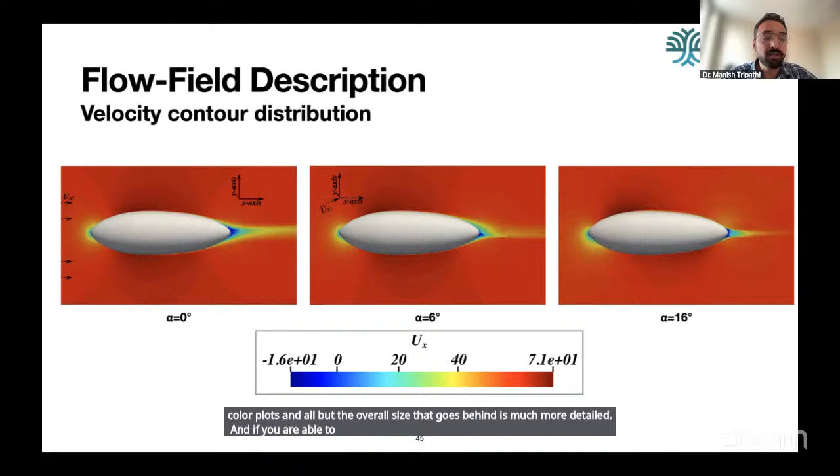And if you are able to get tuned with the overall system or involved in any CFD aerodynamic analysis, you will be able to obtain a lot of good results and hence achieve your desired aerodynamic goal. So this is the whole purpose of me particularly covering this particular study. And based on this understanding, I presume that you will be able to get a hands-on of the CFD analysis, and you will also be able to understand how this method works and how it can be of help to you to carry out aerodynamic analysis not only for airships but for any aerospace application in the future.

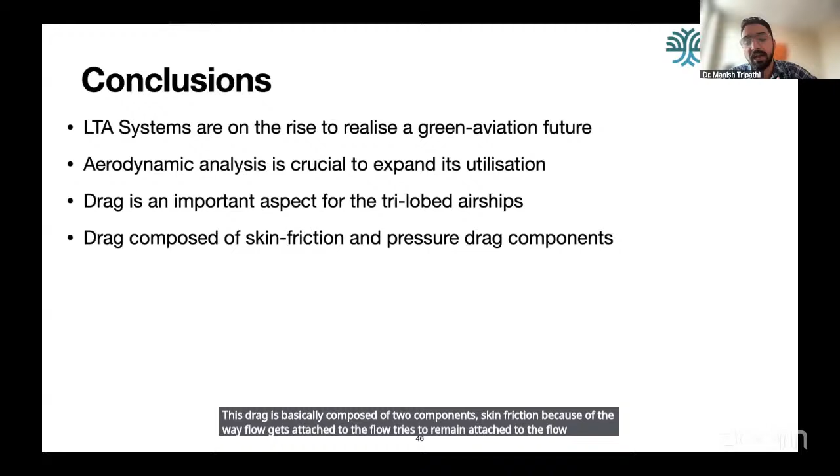So in conclusion, I will just say that yes, we all know LTA systems are on a rise because of their green aviation characteristic, and in order to progress that in a more productive manner, aerodynamic analysis will be very crucial for its future utilization. Out of all the aerodynamic parameters that are involved, drag is one of the most important parameters, not only for single lobe, tri-lobe, but any other airship embodiment that you want to analyze. This drag is basically composed of two components: skin friction, because of the way flow tries to remain attached to the surface, and pressure drag because of the blunt geometry of the airships.

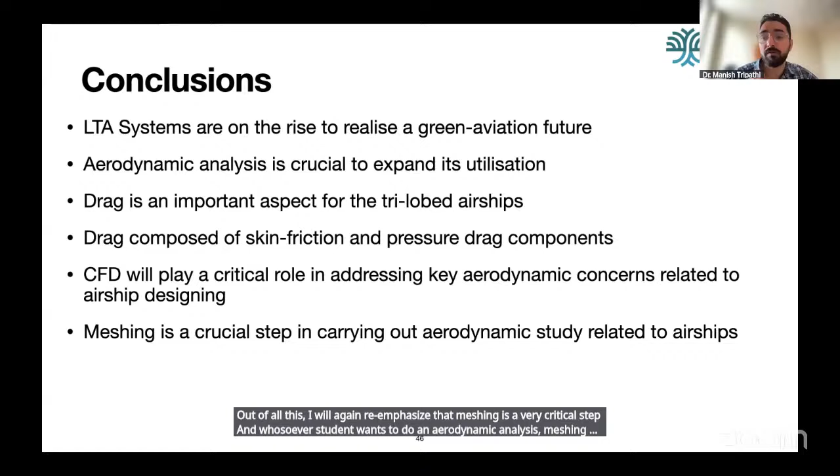In order to understand the aerodynamics, CFD will play a very critical role in the future, and hence getting acquainted with this particular tool is very important for you to carry out any aerodynamic analysis in the future. Out of all this, I will again re-emphasize that meshing is a very critical step, and whichever student wants to do an aerodynamic analysis, meshing has to be taken care of very, very critically for any study.

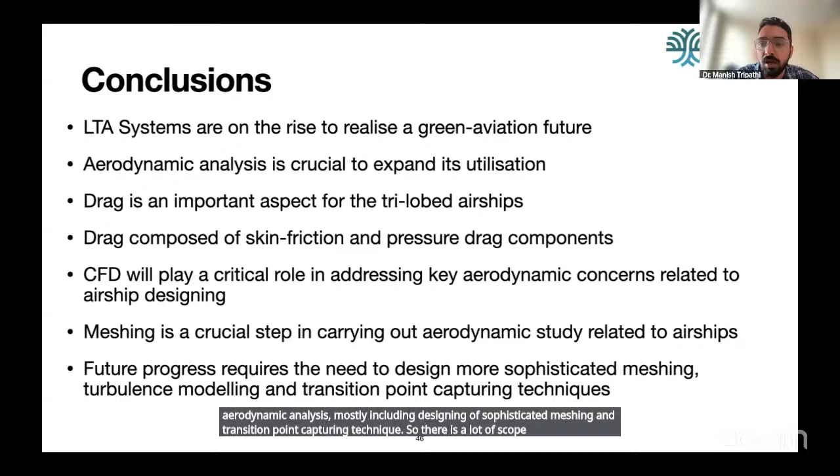For any prospective advanced student who would be interested in any research project, there is a lot of scope in addressing the CFD challenges related to airship aerodynamic analysis, mostly including designing of sophisticated meshing and transition point capturing techniques. So there is a lot of scope in designing tools for aerodynamic analysis of airships overall.

So yeah, that's that from my end. I would like to again thank Professor Pant for giving me this opportunity, and to all the students, I will just conclude by saying what I teach all my students and colleagues: you should never forget the 4 F's of your life: family, friends, faculties, and fundamentals. Fundamentals was the part that I wanted to cover with you today, and I hope I was able to address most of the challenges or confusions related to aerodynamic analysis. And with that, I will say thank you, and I'm open for any questions.

Yeah, you can stop sharing your screen. Yeah, thank you. Sorry for the initial confusion because of the audio-visual system, but eventually we were lucky that we managed to get it working. And also, my laptop has only about 12 to 14% power remaining.

Okay. Manish, you have covered in very great detail the do's and don'ts for carrying out CFD analysis for airships. Now the floor is open for anyone to ask any questions. If there are any questions, we can take a few before we close the discussion. Manish, very good talk. Thanks. My question is not exactly about CFD.